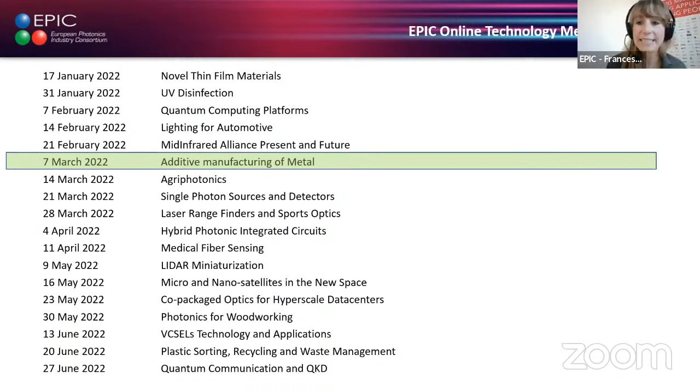Now, going back to our calendar. So this is our EPIC Online Technology Meeting calendar. As you see here, we are at the 6th meeting, and there is something coming up again that I want to specify better here. So if you are still belonging to the process monitoring system, maybe you're also interested in the meeting that we have next week about agri-photonics, or the one on the 30th of May on photonics for woodworking. But then I know that some of you are also interested more in smaller lasers, smaller applications, micro-optics, micro lasers, and maybe the LiDAR miniaturization meeting on 9th of May is something relevant for you.

But then I have something that is even more relevant for all of you here in the room, and it is this other box on the side. So, as I said at the beginning, we started again to really meet in person for technology meetings. After the pandemic it is now time to restart. So a 3D printing of metal event at Siemens Energy in Finspång in Sweden. That's what we want to do on 8th and 9th of June. So keep it on your agenda, because there we want to really talk about technology, not only like here in the Zoom room, but also in person in Sweden.

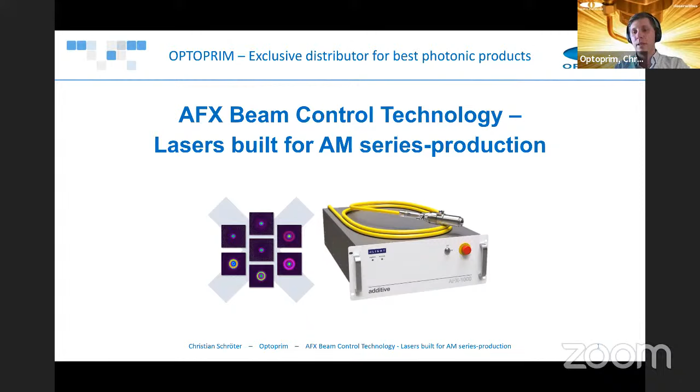So Optoprim is a distributor for industrial and scientific state-of-the-art laser and photonic products. We were founded in 1994, have 65 employees, have locations in France in Paris, in Germany in Munich, and 2 locations in Italy, in Monza and in Rome, and have a strong focus on industrial laser applications and material processing. We're offering sales, application, training, service, and support, and very important, we are a member of the EPIC network, which we are very proud of.

So distributor means, maybe a short note on that, we have principals from suppliers from all over the world and represent them here in our regions, from laser sources to optics to process monitoring, basically a lot of components along the strengths of a laser-based machine.

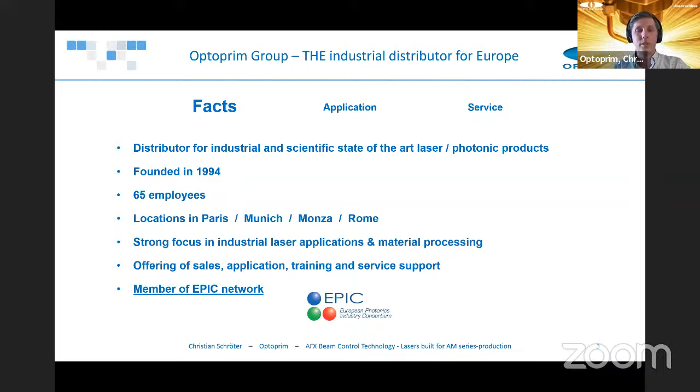Then here a quick overview of our applications lab, as we are also working on the processes with our customers. So from macro to micro to marking processes, we try to have different laser technologies to approach the application as best as possible with the right technology. So using different types of lasers, for example, different types of optics, and we have the analysis equipment as well.

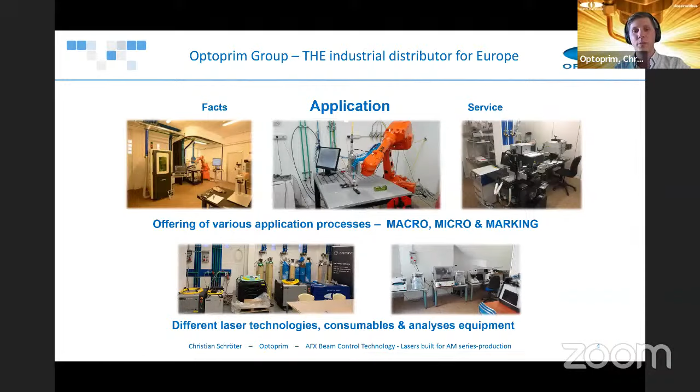And then in general, industrial processes need industrial service. So we do support, training, application support in our lab or on customer side. We have the field service, customer service in general, and also remote service, spare parts. And we also do consulting for laser setups or maybe choosing the right technology for the process of our customers.

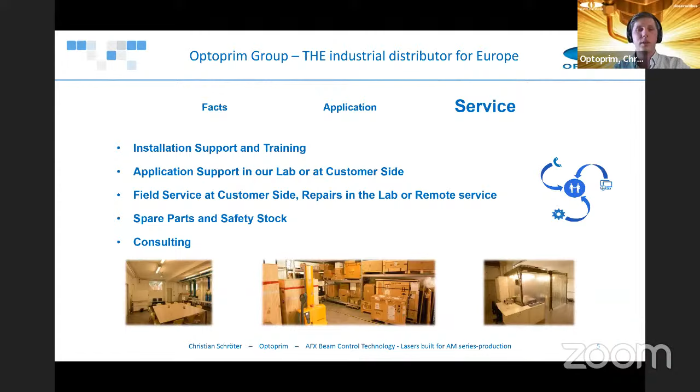Then the second company I want to introduce real quick is also one of our principals, nLight. It's a fiber laser manufacturer from the US. We work with them for more than 20 years with our group. And they are a vertically integrated leading supplier of high power semiconductor fiber lasers. And there are some facts, let's say, in which application areas they are, when they have been founded.

But the most interesting part, I think, is really to see the vertical integration on the bottom right, which means from the semiconductor, then the semiconductor laser, so the pump modules, basically, the optical fiber, and then the fiber laser. And this brings me already to the topic.

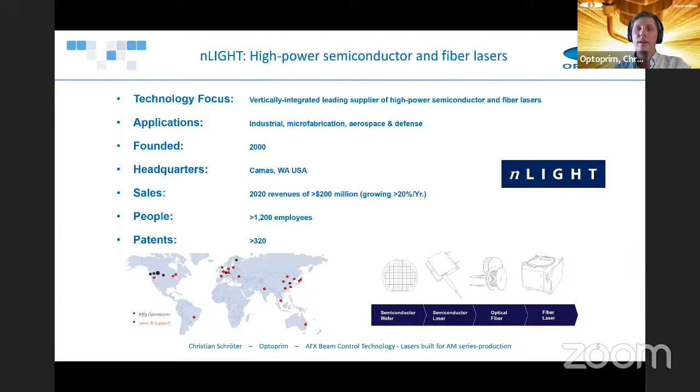We have here a special laser, which is called AFX. So AFX is an industrial fiber laser with a rapidly tunable beam profile, which is optimized, for example, for additive manufacturing. So you can see the different beam profiles which the laser can offer. And on the right, you have the 19-inch rack mount laser, where all these beam profiles are enabled directly from the fiber.

So the motivation why nLight has developed such a laser is the material processing performance really depends on the laser beam characteristics. So typical parameters are the size of the beam, the shape, and the divergence. And the precise heat deposition is critical for controlling these feature sizes, maximizing the production rate, maximizing part quality, then minimizing heat affected zones, spatter, porosity, and other effects which are within the process.

Then also versatility of materials or compositions of materials and thicknesses are the challenges or the motivations. And this technology now is here on a single mode laser up to 1 kilowatt. And we have this technology also used for other applications. So for cutting, for example, or for welding, it's a proven technology up to 18 kilowatt. And it works pretty well. And as we said, it's like different improvements for your process.

Then why do we need such a technology for the AM tools? So what is important? So we have this spatial beam control. So one thing is the standard laser machines are used usually with a single mode laser, as you can compare with a fine point paintbrush.

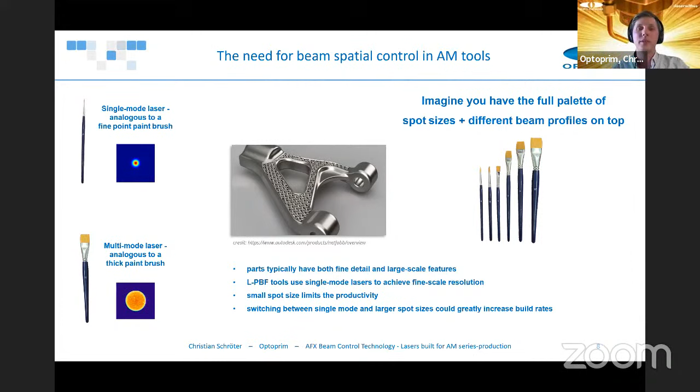So why different beam shapes? Why, in addition to the different diameters, the beam shapes? Here you can see the different profiles. The standard single mode Gaussian beam has very large intensity in the center. With a flat top, it's already improved; you have a wider width of the beam, so maybe a higher productivity already, but there's still quite a portion of intensity in the center, which is also not perfect for the process.

Other technologies, if you want to do this, increase costs and complexity. And if you don't have this combination of more width and the beam shape, the decrease of performance and reliability is also a topic. The ring and the higher width really provide quite a benefit on this.

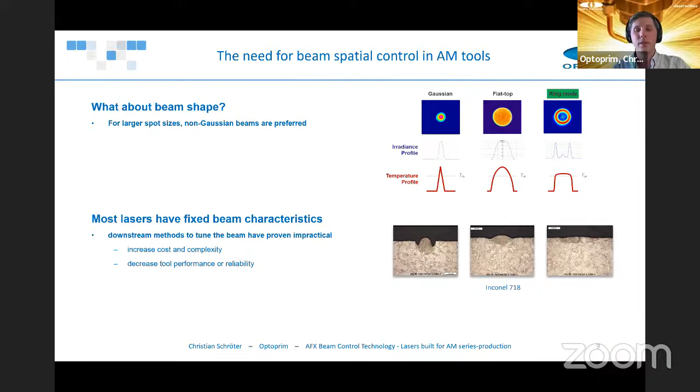So how does it work? I want to introduce you, in a simple way, to the technology, how we can achieve the different beam shapes and have the different beam diameters. You have the fiber laser, then three basic components. It's a feeding fiber with multiple guiding regions, so we can have 2 or even 3. And then you have a fiber that enables the beam to be shifted radially via mechanical manipulation into the different regions, and it needs to be adjusted in very fine detail.

On the bottom, you can see the resonator of the laser in a very simple way. Then you have the AFX. CFX is our multi-mode product; AFX is the beam shaping part. And then you have the fiber with multiple guiding regions. On the right, you can see how we do it: from the center in the core, we shift it step by step from the inner part to the outer part. That ends up, as you will see later in another slide, in different beam profiles, and we can do that on a very fine scale.

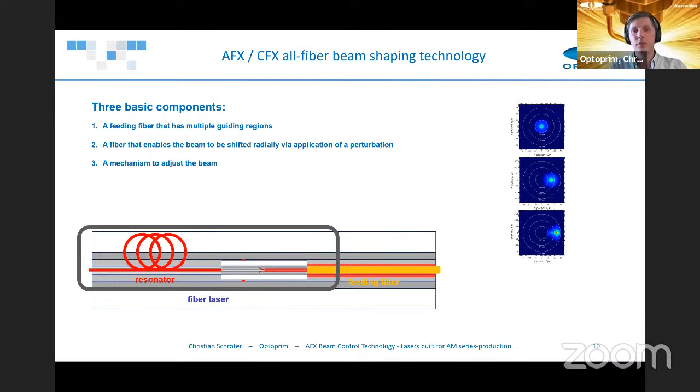We usually have pre-programmed beam shapes, but we can also do something in the middle and be very flexible with this technology. Specifically on the AFX, here are some facts. The AFX technology in the fiber laser maintains all of the fiber laser performance and reliability benefits. There are no free space optics. It's very fast switching, also on the fly during the process, and very reliable. We have done a 20 million cycle test of changing the beam profiles with the same performance of all our beam profiles. And a very large benefit compared to other technologies is a large depth of focus, which gives you high stability of your process.

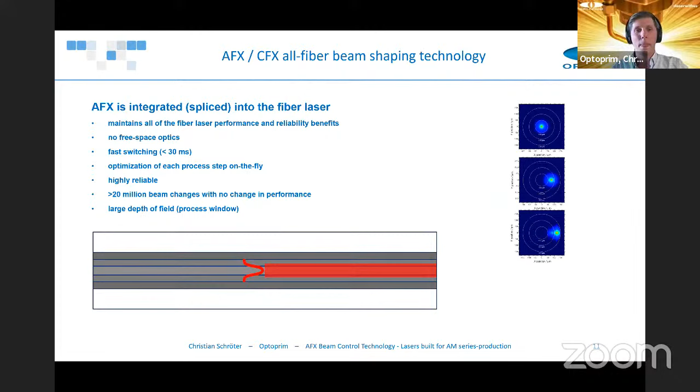So how that works, here's a small and easy animation. You turn on the laser and directly from the laser you see the different beam profiles switching at full power on the fly. You can go from a Gaussian beam to a saddle mode to a full ring mode, and you can shift the power step by step from the inner to the outer side.

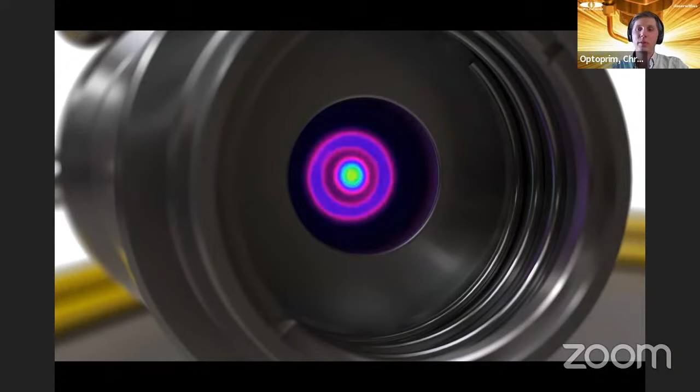Then back to the applications. In general, we try to increase precision or to improve precision, optimization in general, and productivity of the AM process in the powder bed. And that's all for lattice structures, so for fine structures, for mixed geometries, and for bulk geometries.

And how does it work? It's basically using the different beam diameters, which you can see on the bottom. So the spot size 0 is a standard Gaussian beam. To the bottom right here, the ring mode, which is the beam profile with the biggest width. And then additionally, you have these beam shapes, and they have very beneficial properties for the process. And so you can tune from very fine scale to bulky parts or in between only by switching your beam profiles on the fly, on demand.

So here's a first example. We show here some public examples. In this case, it's from Fraunhofer ILT. They have an AFX laser in one of their machines. They did some tests on Inconel 625. And what they were showing here is a reference parameter of a standard powder bed fusion machine, then a maximum scan speed and a maximum build-up rate based on beam shaping.

So the reference parameter is with index 0, standard power, relative standard speed, and 50 micron layer thickness. And then with the maximum speed, they try to see to which kind of maximum speed they can get with the beam shaping. So they ended up at 2,200 millimeters per second, which is already twice than before. And then they also tested the max productivity. So that was a combination of more power, more speed, and higher layer thickness. So they used here 100 micron of layer thickness.

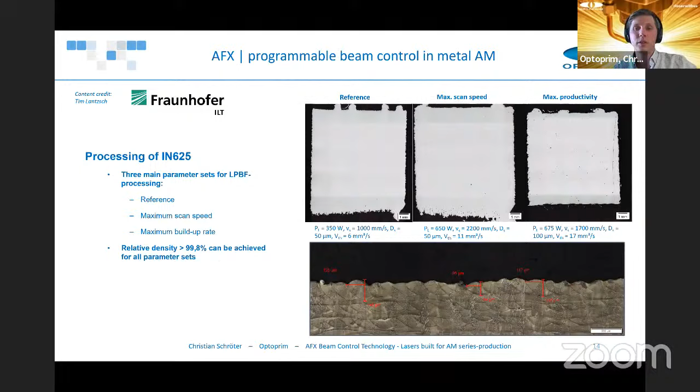Then another example is from Fraunhofer IAPT in Hamburg. They did some tests with the processing of AlSi10Mg, where they used the donut profile to enable higher energy input, especially compared to a Gaussian profile where the peak would lead to much too high laser intensities. And their summary was that they can build parts with a higher build rate of almost 103 cubic centimeters per hour, which is another example for almost a factor of 3, and still keeping the high density. They see still further potentials of reducing the density and then improving the productivity, or even using higher layer thickness for this aluminum material.

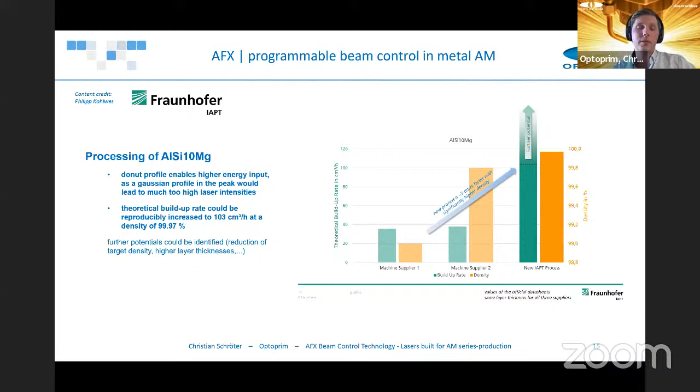Last example is from the Technical University in Munich. It's a processing of 316L. They have seen with their tests, experiments and research that they can extend the process window quite largely in terms of more power and higher scan speeds. That also ends up in an increase of productivity, then the reduction of balling effect, and tailoring the microstructure. And this keyword, please keep in mind, we will hear something very soon about it.

So maybe here also see the beam profiles on the bottom right, where you can really see how to match them and stitch them layer by layer and line by line. It's really a beneficial shape, and that's all thanks to the donut profile you have here.

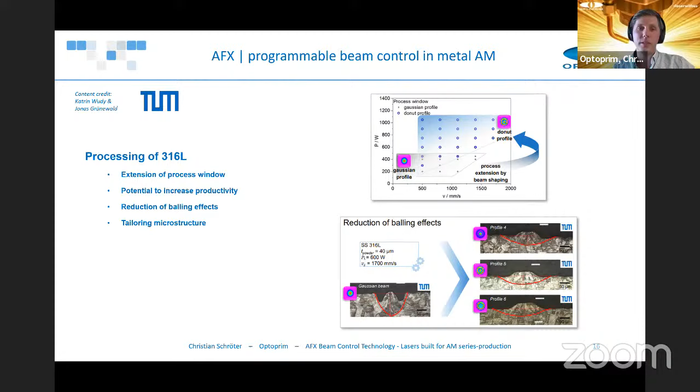So as a small conclusion or summary, the AFX is a breakthrough in laser powder bed fusion tools. It provides unmatched productivity and part quality. It enables a new generation of AM tools for series production, thanks to their benefits. And this novel technology is industry leading at the moment. With these optimized beam shapes, everything is beam tuning on the fly for each process step, basically. And you still have this all-in-fiber design, where you overcome limitations of previous technologies.

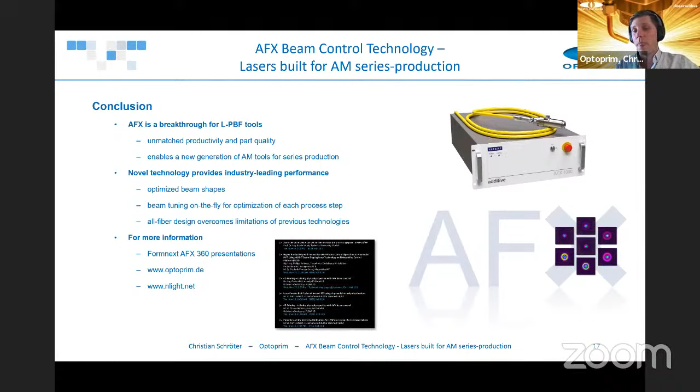So now back to the keyword, tailoring microstructure. So the next level of tailoring microstructure, in general, maybe the next level of 3D printing. How about 4D printing? And that's where I'm going to hand over to our partner and customer, Florian from Aconity, because he's now catching up on the topic, plus some general activities of what Aconity is doing.

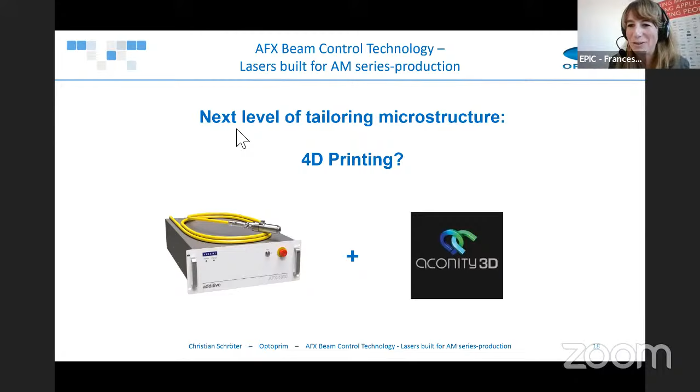Yeah, thanks a lot for the introduction, especially to you, Christian. I hope everybody can see my screen and my pointer as well. So what I want to do in the next minutes is, I hope to be able to give you a better understanding of what this beam shaping, the reinvented beam shaping that you just saw, can give us in terms of LPBF processing.

So for a start, I think most of you know that laser powder bed fusion is not a simple process, and it is in fact not a single process. There are many partially complex interactions and sub-processes taking part. I'm not going to go too much into detail there, but there is a lot happening in and around the melt pool. And at the end of the day, all of these processes define the shape and the size of our melt pool, as well as the solidification conditions.

That means if we look at our final part, the material properties, especially mechanical properties, as well as part quality, being detail resolution, density, and surface quality, are more or less defined by the outcome of this complex interaction. And so far, we as machine manufacturers or as machine operators are somewhat limited in what we can do to influence this process, because typically we are dealing with a somewhat narrow process window.

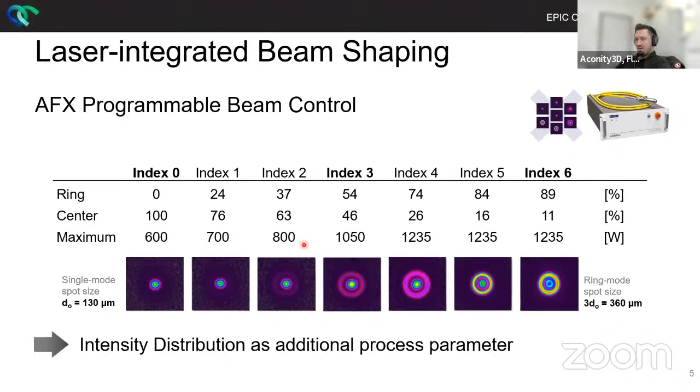And now we have 6 of them, so we need to start somewhere, which is why we did quite an extensive study with Inconel 718. We used our largest machine so far to print many samples in one run. And we carried out 6 runs with 180 parameter combinations each, leaving us with slightly more than 1,000 different parameter combinations that are going to be analyzed in further detail.

So what we did, that's something important to keep in mind to make this a more fair comparison: since the ring mode is always a bit larger than the Gaussian beam, we defocused the Gaussian beam so that it has a similar spot diameter to the ring mode, so that we are not looking at different spot diameters, but more directly comparing the different intensity distributions.

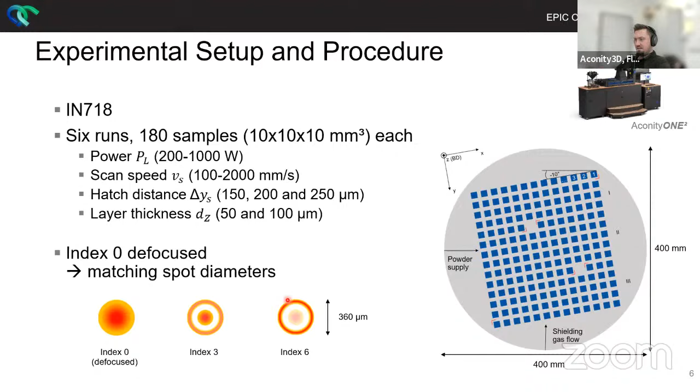And if you remember the image from the slide before, it is a somewhat brutal process layout. So it is, of course, possible that we have some cross correlations, that adjacent parts influence the outcome on their neighbors. But nevertheless, this effect is the same for all combinations that we looked at. So we still can compare those results to each other.

That result also encouraged us to look more towards the other end of the processing window, meaning can we exploit this increased stability towards greater scanning speeds? While this was not the core topic of this investigation, we still saw some promising results. As you can see from Christian's results, there is the possibility to apply these intensity distributions to greater scanning speeds as well.

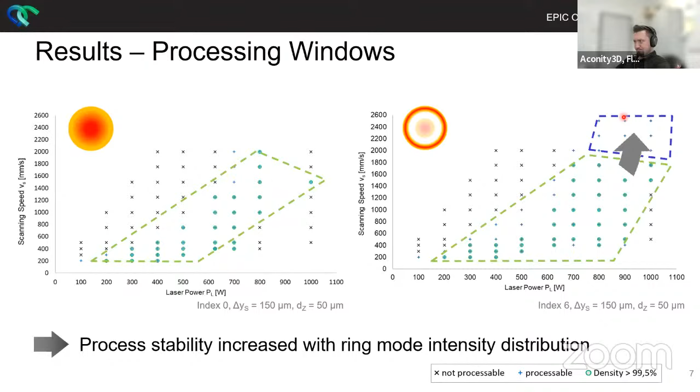We then did extensive metallographic work to find the reason for this, basically, and we didn't really get to a conclusion quickly. We saw that the microstructure looked similar, where the primary dendrite arm spacing was quite similar, no difference in segregation behavior. But at some point, we did an EBSD analysis, meaning that we looked at the texture.

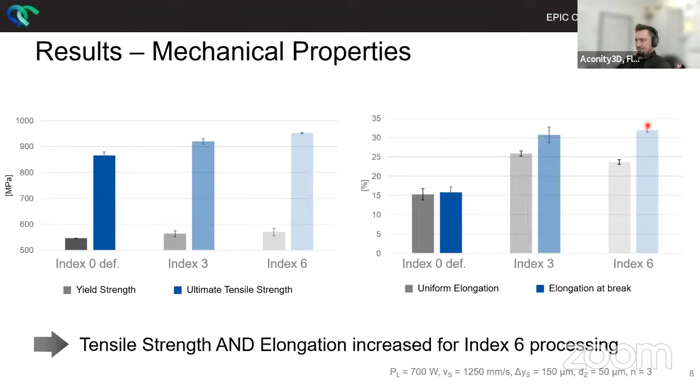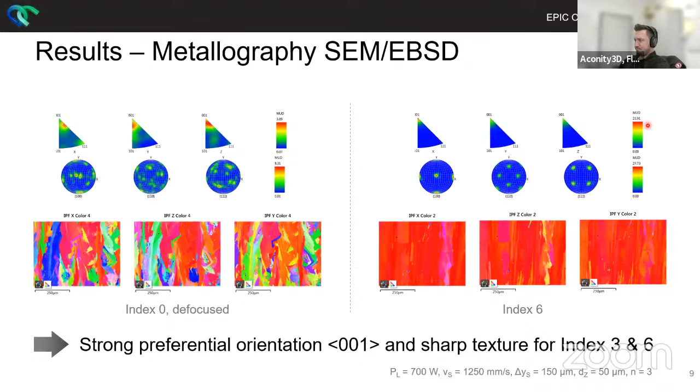Together with our partners, we found out that this is most likely directly correlated to the melt pool shape, where we can force the crystallographic structure to grow into the direction of heat flow, which we can influence with the intensity distribution. In the end, this enables us to directly influence the solidification conditions and thus the mechanical properties of our part, in addition to a generally increased melt pool stability and less spatter production. Since it can be shifted quickly without the requirement of any additional optics, this is possible within build jobs, but also within individual layers, and even within individual vectors.

To conclude my talk, basically what I just presented is the solution. This is also what we can provide. What we need, or what we hope to gain from that community, is the problem. So if you have any part that might benefit from that possibility and you're able to share it, please reach out to us, get in contact with us. We want to see this solution being applied in practice.

Thank you. Thank you very much, Florian. Thanks a lot for this, concluding these success stories with Christian.

So now it's maybe time for you to think about some questions. I see you are still not warm enough, but it's time for me to ask what we call the EPIC questions: what can you do for them, and what can they do for you? Meaning that them is the photonics community, the people here in the room, about additive manufacturing of metal. So we start with Christian, because he knows the community very well.

Christian, maybe we talk about Optoprim, if you know some challenges that nLIGHT has, but also how we can collaborate with Optoprim more, also concerning your labs that you have. Yeah, so that's a very good question.

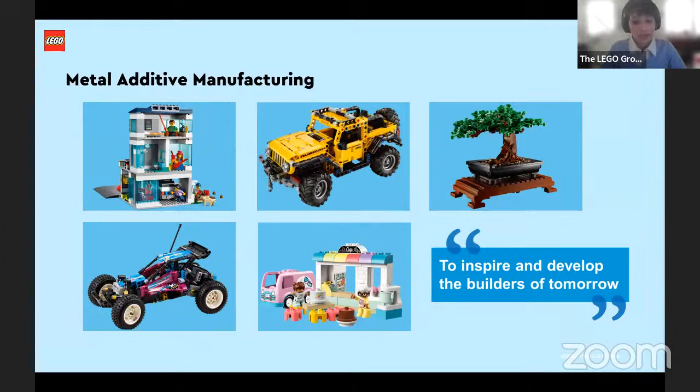Again, in our department, in my job, we never look into a specific process. Our approach is always to the holistic value chain. And that's why I'm presenting you all the steps involved with the metal additive manufacturing process.

But I'm also including in the post-process the final machining operations, because what we're printing is quite far from what is ready to be used for injection molding applications, if we think about the surface roughness, the dimensional tolerances, and so on. And then the last step, of course, is the final application. This is our goal, and thanks to the injection molding, we get our brick.

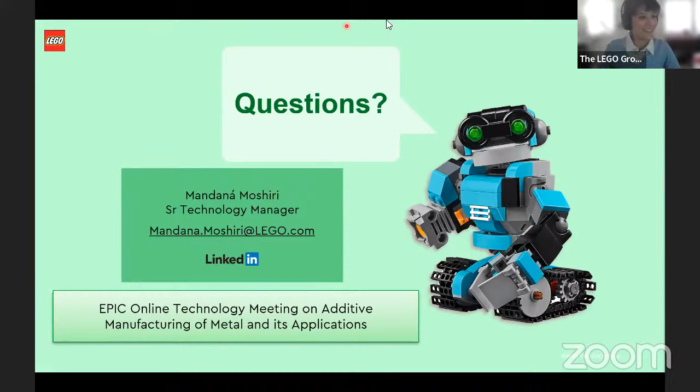Thank you. Yeah, thanks ever so much, and pleased to meet you all. It's the first session I've ever joined for EPIC, and as the title says, it's been pretty awesome actually. So I appreciate everybody sharing their knowledge and their experiences. Mandaná, it must be awesome to work for such a cool firm, right? Trying to explain metal powders in an additive manufacturing world to my kids and my family is too alien a topic. When I mentioned it was in Lego, automatically they started to listen to me. So yeah, I think it's secretly a personal indulgence as well, as Lego is an awesome brand.

So I'll get to the point. What we hear in the manufacturing businesses is that traditional cast molds are, A, very expensive, and B, very long in lead times. I just want to hear from you, has that improved how you have managed your internal moldings and costs, etc.? Has it been a positive impact?

Okay, so what is really important is that we look for the right technology for the right application. I don't believe a one-size-fits-all technology exists. And even for molding, we need to look at what type of mold components in particular we are looking at, what's the complexity of this component, and can we improve the performance of this component with a higher complexity? And also how many times we expect to reuse this part. So there are a lot of background questions we need to answer ourselves.

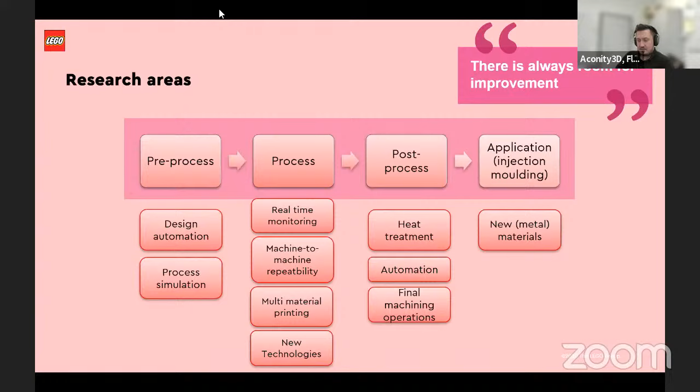So again, here, if there are some applications in your mind or sample parts that just need to be tried out once, it is always possible to see how far we can get with the existing technology, especially in molding, if you think about some copper and tool steel combinations. But then it's a question of the resolution that you want to achieve in your part.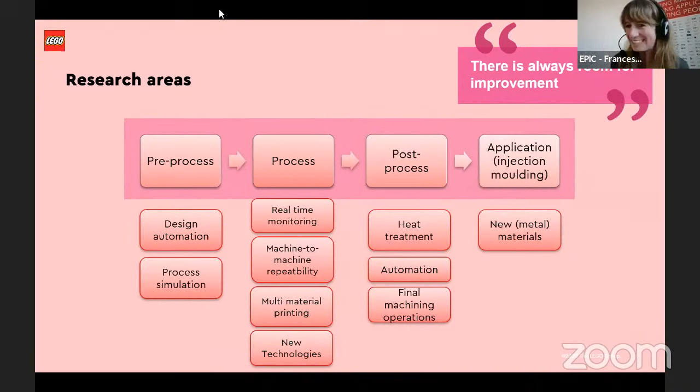So your slide here is kind of interesting for us because I think we've been tackling these applications in an interesting way. First is that we've done a lot of applications for printing molds with conformal cooling channels like you described. But also multi-material. And I think what's interesting about DED, and you'll see some of this in my presentation that's coming up shortly, is that you have no cross-contamination in the process, especially with metal wire. So you have this ability to produce parts with multiple materials and not fight some of these technical challenges that you might see in a powder-based process. So that's something that we find very interesting.

We've done a lot of applications recently with different materials, including tool steels, where we've changed materials in the part to improve the performance of the part. And that's something that we find really exciting. So that's something that's got a lot of traction inside the company. So I just wanted to share that, and I'll talk a little bit more about that in the presentation.

So what I'm trying to do is introduce our DED, or we still stick to the LMD version, technology, and the focus is a bit more on machine intelligence, or to what extent can we put intelligence into our machines or provide intelligent processes. Now, for those of you who are not familiar with it, we've been hearing a lot about laser powder bed fusion. This is DED or LMD, which basically means we're talking about either wire or powder-based processes where we have a pretty high power laser beam source ranging between 1 kilowatt and 10 or maybe even up to 20 kilowatts. We supply the metal as a powder or as a wire.

And if we do things right, we create a small melt pool that we can perfectly control. And if we move it across a part, we can deposit track by track and layer by layer very complex objects. And I fully agree with Brian. This is a technology that can already do multi-materials. It's perfectly suited for repair jobs, for modifications, as well as for really 3D printing from scratch. And part of my story is also about printing 3D objects on existing 3D parts, which will come a bit later.

Now, obviously, what we do as a company is we build these machines, and you can see some pictures here. It's CNC or robotic systems in various sizes. And actually today we combine wire-based processes and powder processes, and some machines even combine both of them.

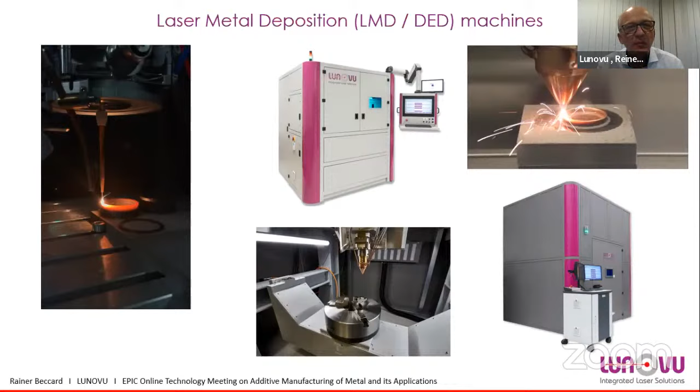Now, just to get some feeling for what is possible today: the blown powder process is pretty old, like 20 years or so, but it has come to a very high degree of maturity. So we can print very different objects. And besides all this coating and repair stuff, we can build things like this here.

This is a typical demo object consisting of 500 layers, pretty high, single wall with a very good control. Really close to the final shape. There's only a little bit of machining required afterwards.

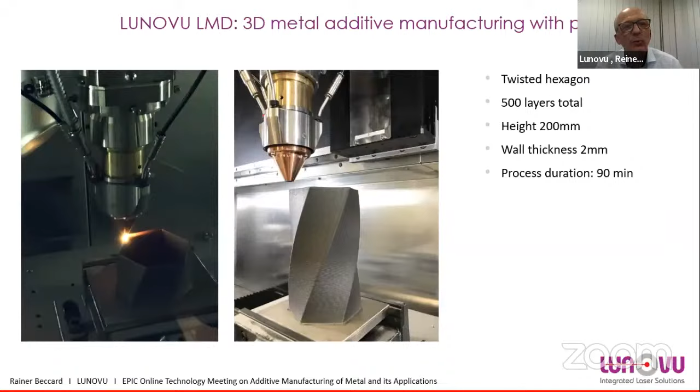And more recently, we also went into the wire processes, and we actually do have a certain type of cooperation with Precitec. Now, what is really new about these wire processes is that they now have the capability to run in a multi-directional mode, which means it doesn't make any difference if you run back or forth and left or right, which has not been the case in the past. And that's due to a special design of these processing heads.

And so actually what we do is we integrate them into our machines as much as we do the powder-based processing heads. Now, there are some advantages that people expect from the wire if you compare them with powder. So first of all, the material efficiency is high. It's always 100% because there's no powder that gets lost. And obviously, there's an expectation about lower material cost because producing the powder is pretty expensive because it's a complex process and wire is already available.

So it really looks like processes can be much cheaper. And hopefully also people believe it can be less risky in the operation because it's kind of a hazard-free, powder-free process. And what we do achieve is something like this here. This is also something we got from Precitec as a result.

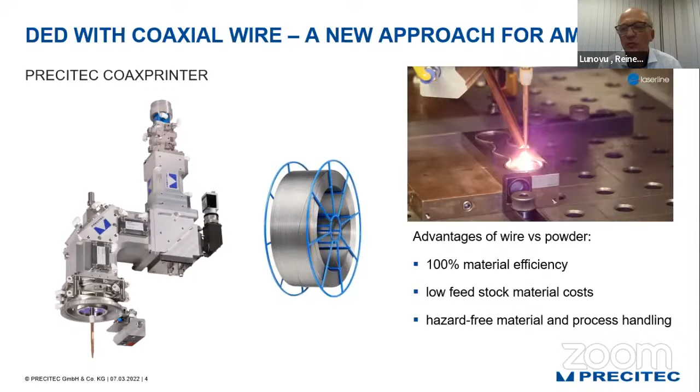Build rates are maybe somewhat lower compared to powder, up to maybe 2 kilograms per hour, while the powder-based processes go up to 5 or 6 kilograms per hour. But what we can achieve is actually pretty similar achievements in terms of thin wall structures like this one here. And I think these processes are approaching in terms of the performance through the next few years.

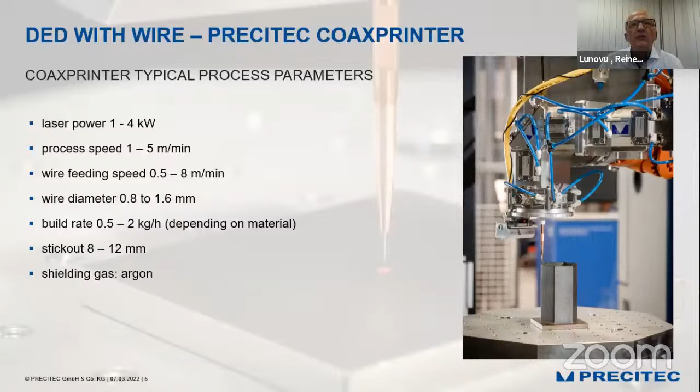Now, what is relevant from our point of view is really the process chain. And I already said it earlier, we try to put some intelligence into our machines. And I want to give you one example that shows you briefly what we mean with that. And this is about hybrid manufacturing. This is an example where we took a cast part, and the idea was really to take a standard cast part and do some customization on this part.

So the idea was really, in order to reduce costs, just prepare a certain set of standard cast parts, put them into the shelves. And if the customer calls and says, well, I want to have type number ABC, they would like to literally print a kind of 3D extension on the existing cast part overnight and then ship it. Well, what we wanted to do is really start with the cast part as it is. So we didn't want to accept any pre-machining.

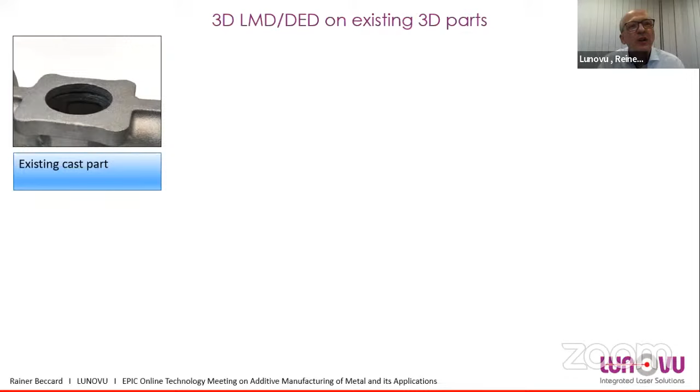And that's why we introduced our scanning technology. So all of our machines come with an integrated 3D scanner. And you can see in this small picture a kind of purple line that moves across the surface. And what it does, it generates a true 3D scan of the part. And as a result, we get this visualization of the scan. So we get a 3D model on the PC.

And in the next step, we can load an additional geometry from CAD data. So we kind of merge these two worlds, the scan world of the existing part, which can be any arbitrary part without any CAD data, plus the CAD world. And we just merge them, bring them together, adjust the new extension on the existing part,

and then run through the software, which does some slicing and toolpath calculation, and finally ends up with a work recipe or an NC code that's loaded onto the machine, and finally allows us to print directly on top of the part. And the trick is really that there's no manual programming required, and we can work on any kind of surface and print 3D on 3D. And this is what it finally looks like.

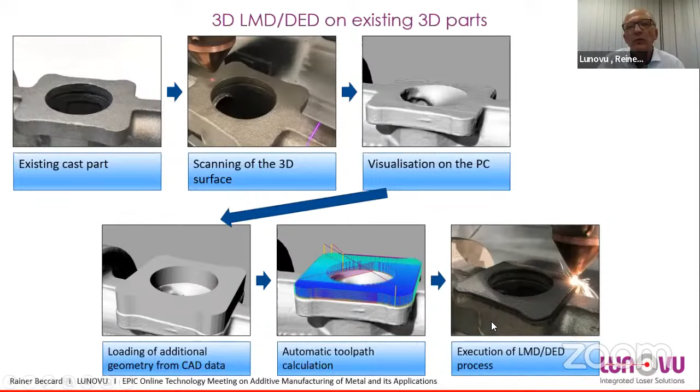You can see the flange that we've printed on top of the cast part. We could print it on any part of the surface. We don't need to prepare the surface. And you have to do the machining anyway after the cast part is done. And if you have done the final machining, you won't see a difference between the printed part and the initial

part. And the other important thing is really you can print any material on top of the other one. So this is already where we can apply multi-material, we can apply graded materials, we can control material properties like grain structures or hardness or whatever you need for specific purposes.

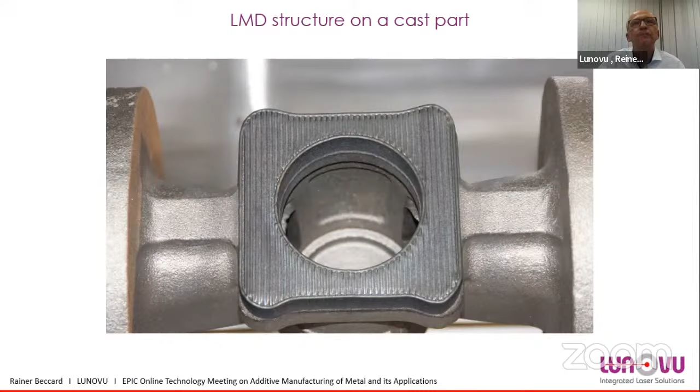Now, I think the question that was raised by the organizers was really, what can the community do for us, and what can we do for the community? And that's what I want to answer here. So pretty much like the previous speaker, I want to emphasize we have an application lab that we run, and it's an open lab. So we try to open it to everyone. So what we expect from the community is really talk to us, come with crazy ideas. Nothing is too strange not to try it. And what we offer is actually our expertise in our lab and our machines to try things.

So if you have a specific material or material combination or an application or a part you want to test, and maybe you've never done DED before and you don't really want to buy a machine at this time, you can just come and try, because we feel it's a very early stage in this development, especially if we talk about hybrid manufacturing, multi-materials and stuff like that. So the invitation is really, let's just try, talk to us, and let's see what we can do for you or what we can do together.

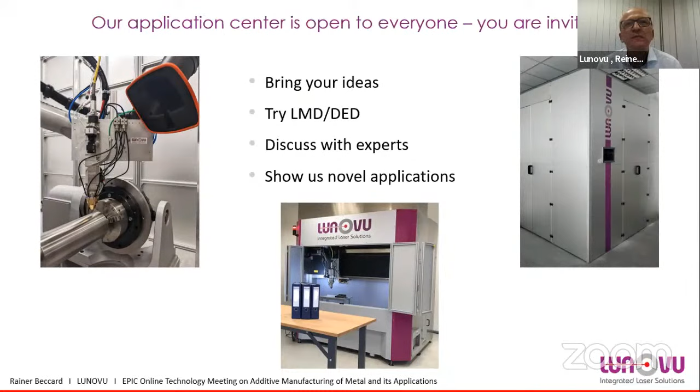Thank you so much. Very impressive. We said that this technology looks extremely interesting and clever. And I see that we have already one raised hand from Jeremy from company Sinova. Please go ahead with your question. Hi, Rainer. Thank you very much for this presentation. Can you hear me well? Yes, that's perfect. Very good.

My question is regarding the DED platforms. Essentially, most of the DED systems are installed today on standard milling platforms that are designed for rigidity. Do you find that the bottleneck when you're producing these shapes is your ability to push materials through, or is it your ability to move faster in corners, for example, to prevent over deposition or overexposure? Would you benefit from a more dynamic machining platform in which to put your DED system?

No, not really. I have to say, what we actually do is we build our own machine platform, because the requirement is a bit different from a milling machine. It's not as fast and not as precise as the milling machine has to be. If we're talking about dynamic behavior, we're talking about a few meters per minute travel speed with very moderate acceleration, and so that's not really the key point.

I think the trick is really the combination of right mechanical design, control, and it's a lot about software. So our feeling is really that this process chain of how we control the processes is most relevant. And that's why we've decided really to come up with something that is completely our own design. So we don't really rely on an existing platform, actually. Good. Thank you for the answer.

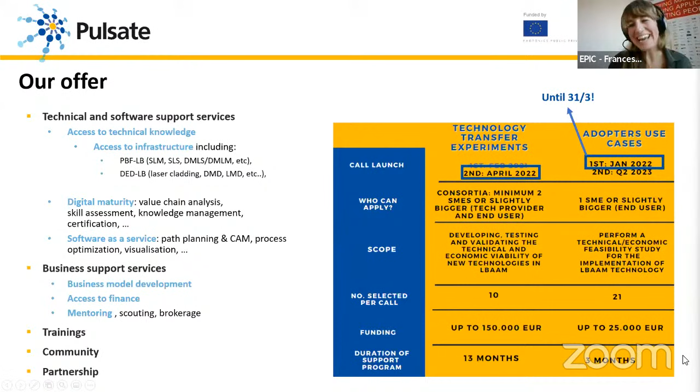And you know what? There is not only Pulsate. There is also another initiative that we have here in the room. So all ways to get to work together. And in this case, we have here Amires and also, are you there? I see. Okay, Martina, yeah, you're there. So maybe it's the time to talk about Manuela as well, right?

Yep, I think you made a perfect introduction. So when you already mentioned some ways of funding or some ways of exploring additive manufacturing, and if it's something that you could benefit from, so I will try to share the screen. So can everyone see the presentation? The slide is there. Perfect.

So I'm actually here on behalf of one Horizon 2020 project that is dealing with creating an additive manufacturing metal pilot line. So the project started already in 2018. And the goal is to develop a pilot line that would offer the full cycle of additive manufacturing of metals, including simulation, design, process control, characterization, and even the post-processing, post-treatment, and qualification.

So the interesting part is that there are 20 partners in this project, and we have both the powder bed fusion laser beam and the electron beam machines. So there is really a lot to experiment with and to try. So within this project, we also have an open call, which calls for any companies, any individuals, anyone who is from the EU or associated country to apply for this open call, and you can receive up to 100,000 euros of costs covered.

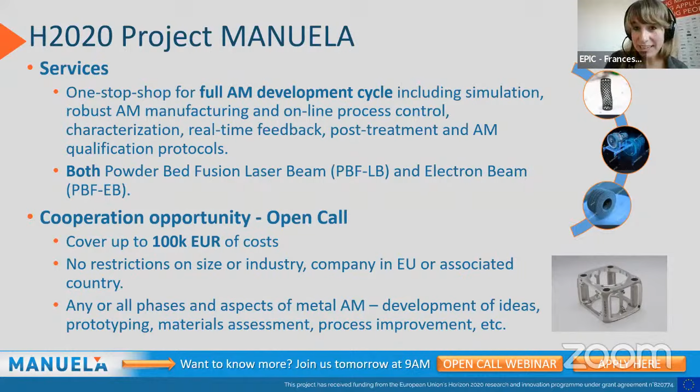Very good. Thanks a lot, Martina. So as you hear, there is a lot of opportunity to work together, getting even a bit more money for this, get services. And so you can work together. You can find out who is right, who is wrong, who is middle right, middle wrong. That is not the point, but the point is to find your final solution, the best compromise for the technology you want to provide and to use. So thanks a lot, Martina, as well. So reach out to her, to me directly. We can all facilitate the application to all the possible calls you heard today.

So now it's time for, last but not least... We know him already. We heard him before, but now it's time to show his slides. He gave already some anticipation on the multi-material. So it's really time now to give the floor to Brian from Meltio. Thanks for being here, and the floor is yours.

In presentation mode is even better. You regretted it now? Thank you, everyone. Okay, let me start my slides here. And let me see if I can go in presentation mode. Hope you've seen that okay. Yes, there you go. Okay, perfect.

So I know we haven't got much time, so I'm going to get through this really fast. So I'm going to talk about Meltio. I'm the Chief Technology Officer of the company. Really what we want to do is to bring down the cost of metal additive manufacturing, but also actually increase the quality. So lower cost and higher quality, that's really our driver to be a disruptor.

The technology is about 6 years old. We've incubated the technology for 6 years. It's a multi-laser architecture I'll show in a moment. But really, we've been a commercial entity for about 2 years. The first 6 months of that 2 years, we developed the systems and a new factory.

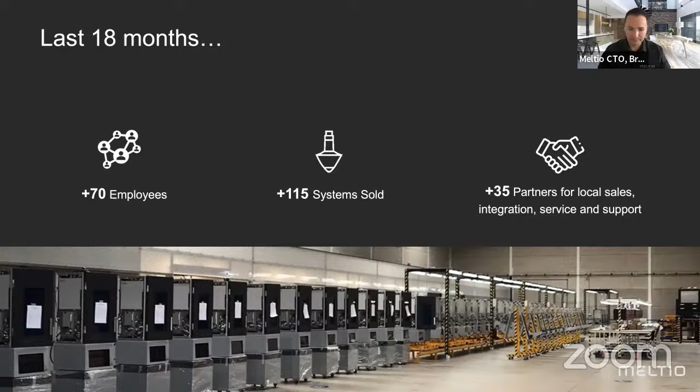What we're trying to do is tackle that friction in the process from the end user perspective. We want to remove those high upfront costs, and increase the capability in what you can do - not just small complex parts, but large complex parts and large simple geometries as well. Multi-material is a really important area for us. So those are the things we're focused on.

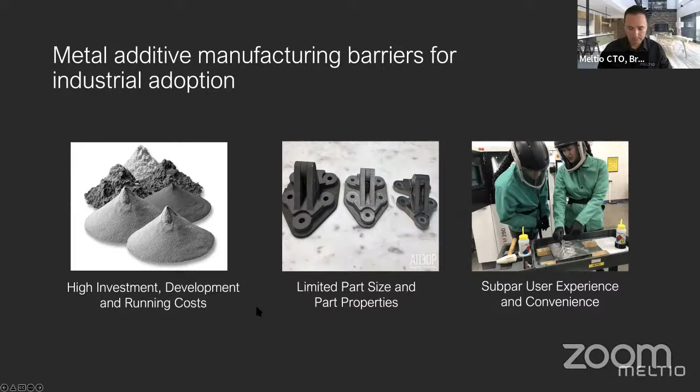Wire is 99% of our focus, because of the benefits - and the presentation before me eloquently described the benefits of working with metal wire. You use all the material, it ends up in the part. You've got a lower cost material feedstock, probably the lowest possible cost feedstock, and it's clean and safe to handle. That's really where we've put our focus.

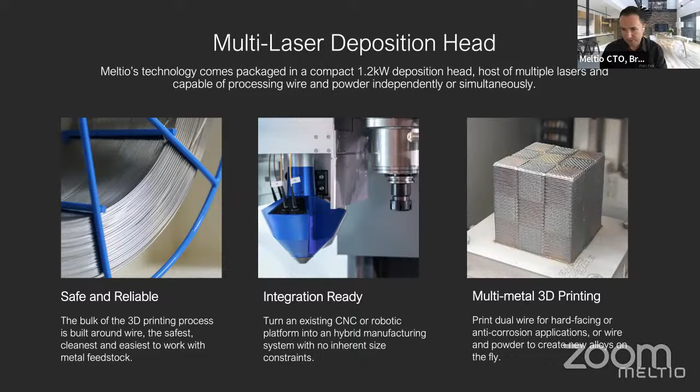That allowed us to develop the Meltio engine, which we use to power CNC machines and robotic systems. So that's really our product range. From a manufacturing sense, it's like 2 products, but in the market it's like 3 products, because you've got those 2 flavors of the Meltio engine.

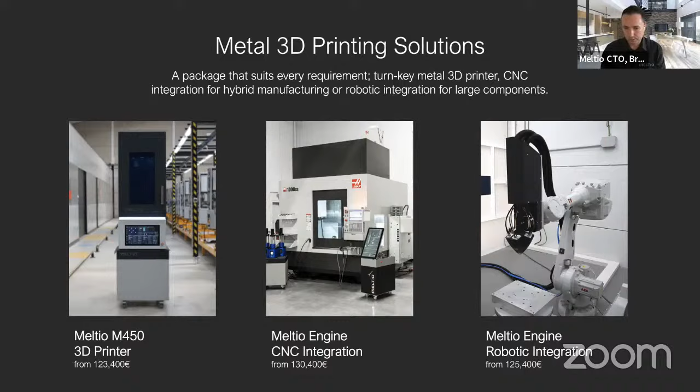The Meltio engine is actually the same product for CNC and robotics, except for the CNC integration we have this thing called a deployment mechanism. That allows the laser head to motorize in and out, so you can do wet machining side by side with 3D printing, all in the same machine, without worrying about contamination or damage to hardware. For robotics, you don't have that deployment mechanism, so the head is permanently attached. That's really the only difference.

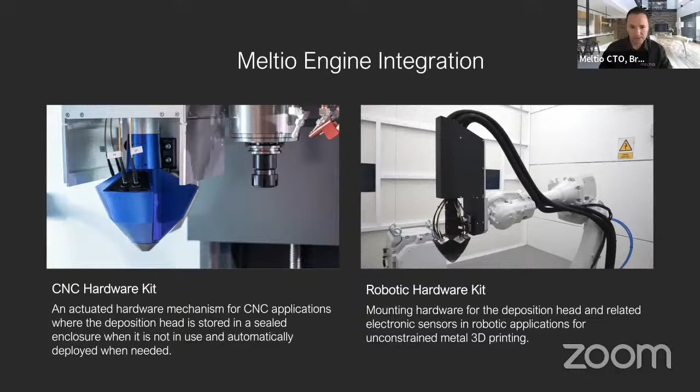And then the CNC integration - this describes what I said with the deployment mechanism, where we can deploy and retract the laser head automatically. I'll skip the other video because we're running short on time.

And then robotics - a couple of videos here just to show how that works. I love the robotics; it gives you this huge capability for complexity because of the dexterity of the robot for multi-axis, and you can do these really large parts.

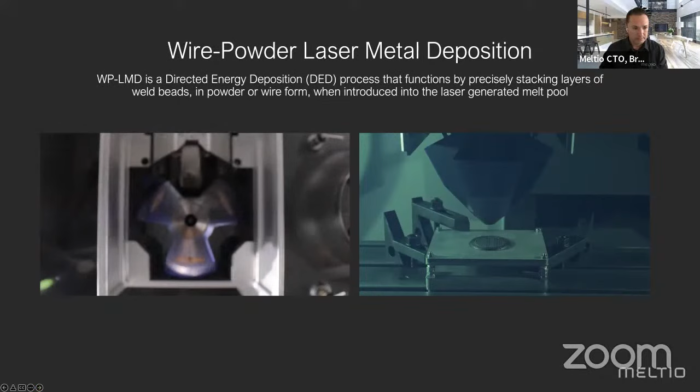Important to note, we've also developed really interesting software solutions for this. So you can do things like non-planar slicing, like you see on the right, which is not simple to do, because you're changing the amount of material you deposit circumferentially in that example.

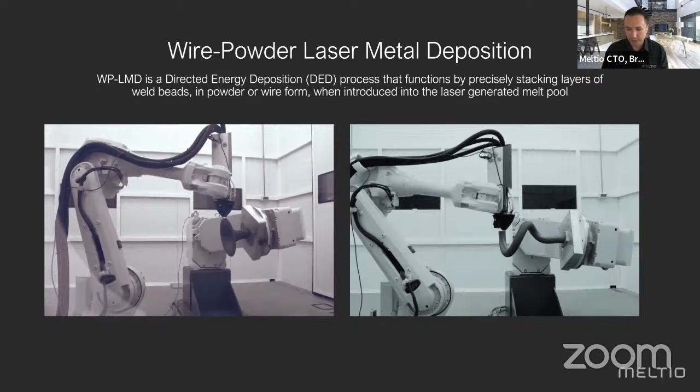So really what we're trying to do is give a solution where you can print a part really quickly with metal wire. The part shown on the left is kind of coarse because we have this nice flexibility where you can print really fine detail and work slower, or if you just want to print a part quickly because you're going to post-process it, you can go for a larger layer height like shown on the left. So we have that kind of flexibility for the end user.

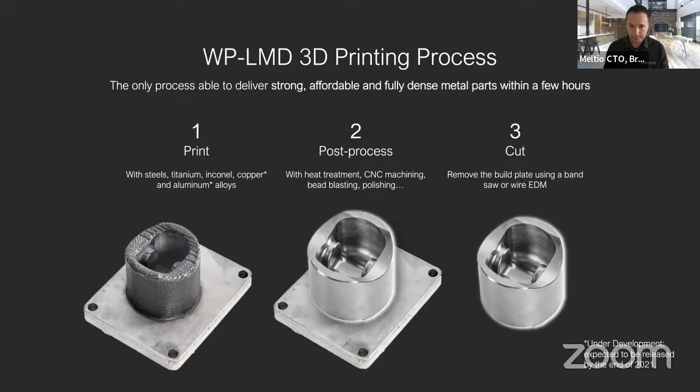Really, that's just a simple process. I mentioned we work with wire - we can also do dual wire. The head is actually capable of blowing powder too. That's not something we put a lot of effort into, to be honest, because wire just has so many benefits. But that's another unique characteristic of the technology.

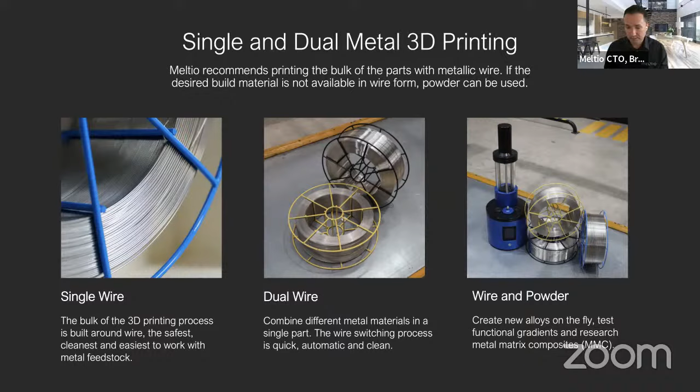We've got an open materials platform similar to software. So if you buy the machine from us, you can work with any commercially available material. But we also offer our own materials just to allow the end user to benefit from our process knowledge with the different materials. We've done a lot of testing, independent lab testing. We've demonstrated insanely high densities and other properties. Here's some examples. You can go to meltio3d.com and see these material properties on the data sheets.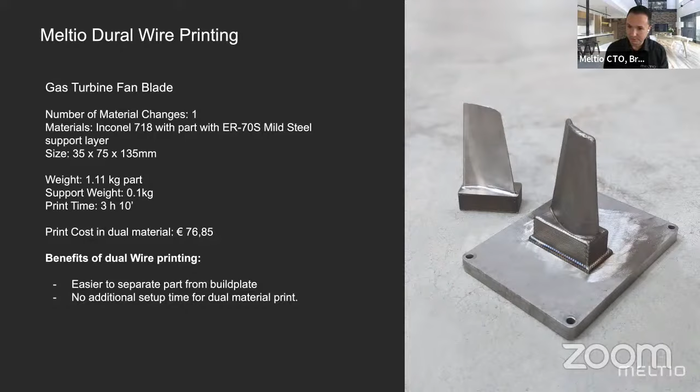Then we've had more complicated multi-material parts where we've worked with materials that have magnetic properties. We recently finished a project to develop a part for a future rover for Mars, which had multi-material, and came out wonderful, improving the metrics of the part from a performance and characteristic standpoint, especially for mass for a product like that.

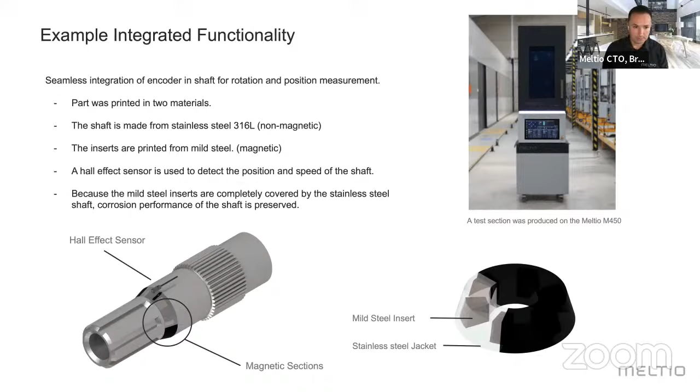This is what we're trying to do. We're trying to get from research all the way over to real world manufacturing. We have a lot of actual production applications now, production customers. The reason we want to get there is because we really want to put thousands of machines per year into the market to have the disruptive effect we want to have. This year we believe we will sell over 200 machines. So we're getting there, but we've still got a long way to go. But the key to that is having the lowest part production cost and the machine being easy to use. Those are the 2 things we believe are the most critical aspects to getting this sort of mass adoption.

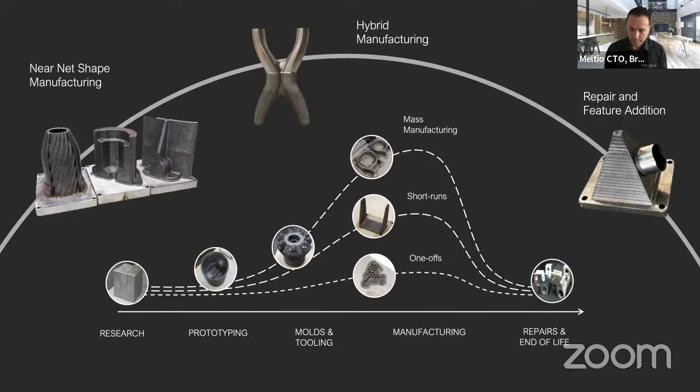So here's some examples. I'll just point out things like the mold cores, and we've done a lot of injection mold applications with conformal cooling channels, including with metal wire prints. So that's a very interesting application for us. One of our customers actually bought into our technology just for that capability. So that's something that's really great with this technology.

Here's some sort of before and afters, just examples of customer parts we've made. Again, some mold cores, like I mentioned, as printed and post-machined. And the post-machining you can do in the CNC hybrid, or you can do in the two-step process. So you can work in either way.

And here's some more examples. I won't play these videos because I know we're short on time.

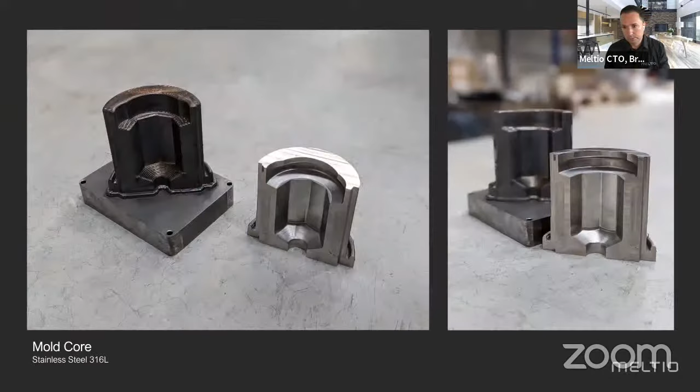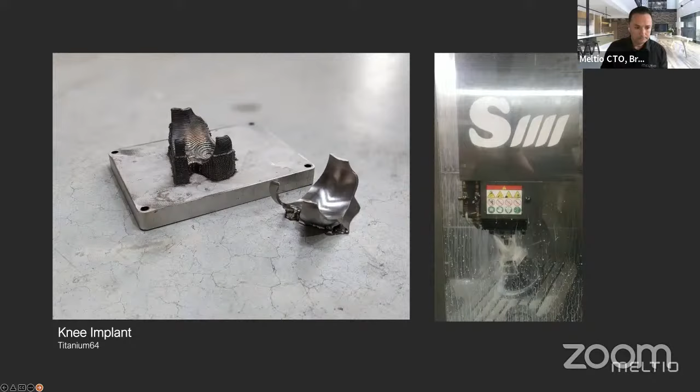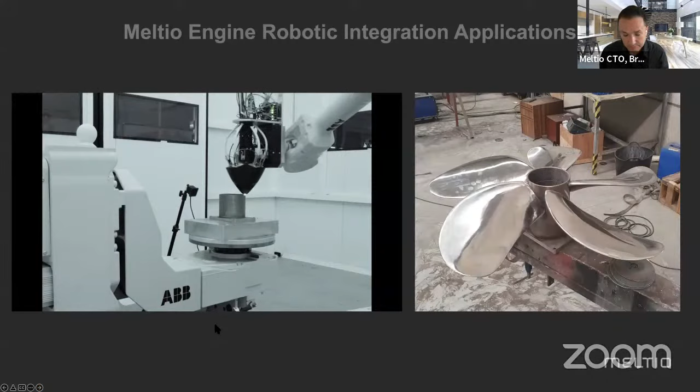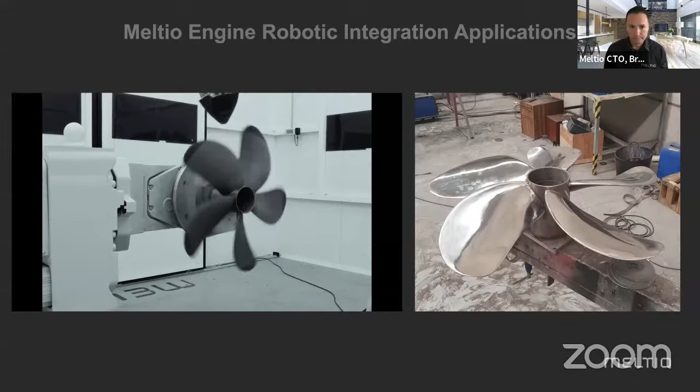For robotics, you can go really big, or you can work with small, delicate parts like wearables and watch bezels—we've done a lot of those. Or you can work with really large, complex parts like you see here. The nice thing about wire is that you can work at any angle. This is a part we made to demonstrate printing at a 90-degree angle, and you get great properties. We've actually done printing upside down as well, which would be very difficult with powder, but with wire it's no problem.

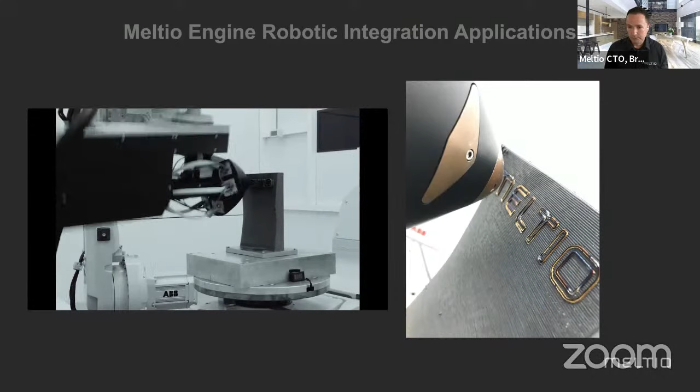Almost done here, last slide. So here's some more examples of different applications. Honestly, we've got probably thousands of applications now, and it's always difficult to know what to show because we've made the technology very accessible. I think there's been a lot of industries—we expected that, but we didn't expect it so fast—coming to us to explore the technology. It's exciting to see, but it's hard to cherry pick what to show. Hopefully you've seen the breadth of the technology. Thank you for your time, and happy to be at this great event.

Thank you so much for this impressive presentation. So I'll go with the epic question: what you can do for the others is nearly very clear, but please also answer—what can the others do for you? How can we set up cooperation with the EPIC environment?

That's a really good question. The first thing I'd say about Meltio is that we're a very transparent company, so we'd love to get involved in applications and strategic collaboration. My goal this year as CTO is to be involved in 24 speaking events, about 2 per month on average. The reason is we want to stay connected with the market, because if you're a systems manufacturer, it doesn't matter how good your product is—if you're not connected with end users and don't deeply understand what the market wants, you will not be successful. So it's really important for me to keep my finger on the pulse and work with colleagues like yourself in that regard.

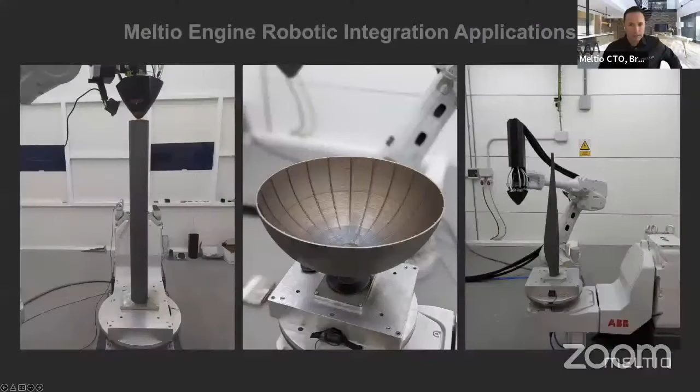Thanks for your question. Going back to my slide, control of the heat in the part is critical in this type of process, and we can manage it in a number of ways. You can see this part in the center—actually all of these parts sit on this rotary bed, a positioner. In the M450 it's the same principle but on a smaller scale, and this is actually a cooling bed. We can modulate the temperature and control how much heat we remove from the process, because when making a large part or a dense solid, you're putting a lot of heat into the part, and that heat has to dissipate. So we create control over the temperature gradient and the removal of heat from the process. This has had a huge effect—for example, with parts like this dome or hemisphere, you would get thermal distortions if you did not extract the heat from the process. Our material testing has been done on parts produced this way, so it's a really critical thing. Now for the second part of your question, about copper and aluminum-based wires...

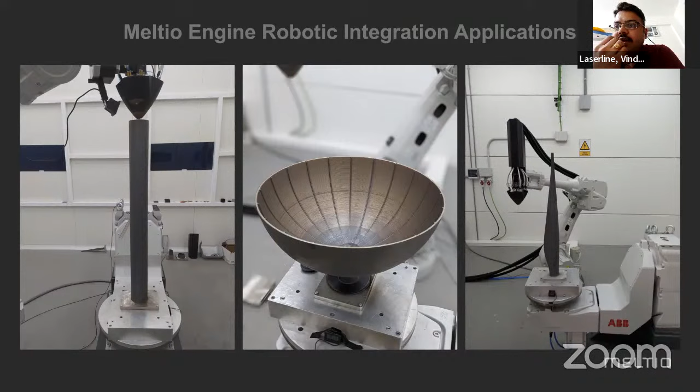Yes, so we've tested approximately 25 materials. So we have a process where we have materials that we publish data on, where there's independent lab testing, and we have about 6 materials in that space right now. And then we have research materials, and then we have development materials.

So copper, we've actually tested a few different copper alloys, plus pure copper as well. And the same for aluminum. So we're migrating those materials from the research space to the tested space. At some point this year, I think we'll have material data sets on both of those 2 materials. But if you look at the total materials, we've probably tested about 25 different materials as of today. So it's quite a broad range.

Okay. Thanks, Brian. Thank you also for your question. Thanks a lot, Brian, also from my side. Now, to wrap up a bit for the last minutes, I steal you 1 more minute from this meeting and fantastic discussion we had today.

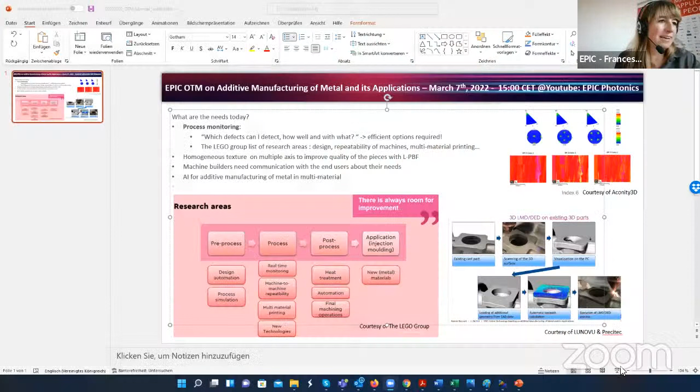So the idea is that I usually like to share the conclusion of this meeting, or at least what were the hot topics of this discussion. And we see it here. So as you imagine, more than 1/3 of my slide is pink, because one thing that is really important for us was what Mandy told us. So what is needed today is studies of all these things. Of course, there are priorities, and everyone has his own needs in different aspects,

and that is the suggestion. So machine builders want to talk to end users like Mandy, and from them they hear what is the highest priority and on what. So please keep all this in mind. All these boxes are very important also for the afterwork of this meeting. Let's not forget about this, and let's ask the end users to talk more like Mandy did with the machine builders and also the providers of the components, because they can also be useful to complete the full picture.

Then for process monitoring, let's go back a bit to the beginning. This was already something that Florian mentioned in the first block of presentations. What he said, here is a citation: which defects can I detect, how well, and with what? So this is exactly the core of what Aconity3D told us. And the point is, it has to be an efficient option. Otherwise, the machine builder has to see the advantage of implementing certain process monitoring systems. And that is why the process monitoring providers should talk to the machine builder as well, to find what is really needed, for which kind of parts and for which kind of work.

And then we see the picture there. So Aconity3D worked a lot on homogeneous texturing. So beam shaping is really something relevant, and that is one application of this. But we know that with beam shaping you can really improve, and together with process monitoring, that is something that is definitely needed.